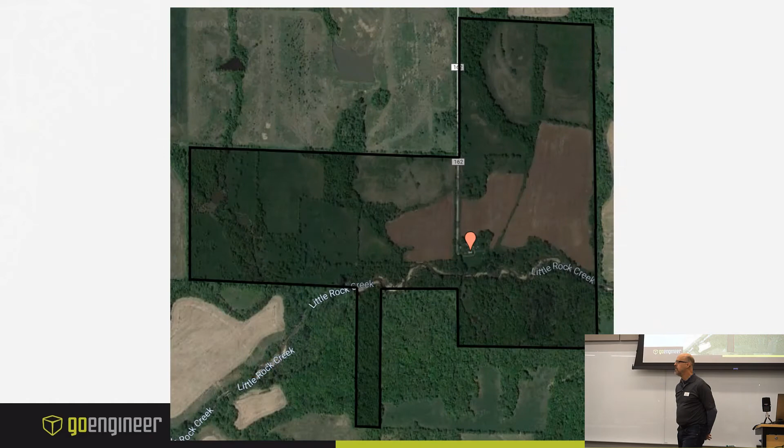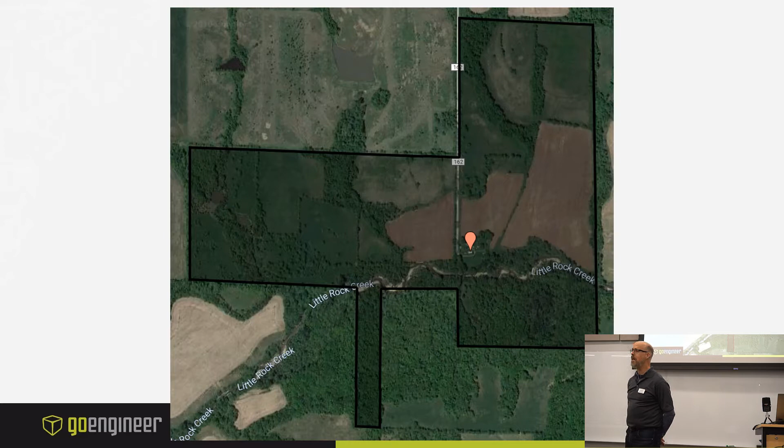Back in August of last year, my wife and I got the last of our 4 kids off on their own, and we decided to escape to a farm that I inherited up in Northwest Missouri. So I've got 188 acres up in Northwest Missouri, in the smallest county in Missouri, Worth County. My wife and I are out there trying to restore it. My grandfather and my father were both raised on this property, so we're now trying to bring it back up to its original glory. It's kind of fun.

So what we're here today to talk about is Weldments. I use Weldments in the shutter industry to do the frames around the shutter, because each shutter is custom, and I used it for wood. Obviously Weldments are kind of for metal, but I'd like to get an idea of what you guys are using it for a little bit, and kind of help me make sure I cover some of the points.

So, are you using Weldments? Larry, you're new to using SolidWorks, so this is new to you, you haven't even used it at all. What about you for Weldments? No Weldments? Chassis design, okay, cool. You guys? Tanks, stainless steel vessels, stainless steel assembly - Weldments for that?

Somewhat? Okay. What kind of challenges are you up against that you're hoping to get today? A lot of the challenges we're seeing right now with the smokers being barrel shaped - we design it in SolidWorks as a cylinder, but in reality there are flat spots, and so when we get out to the floor and into the assembly process and the welding, the fit up is not always what you'd see in theory.

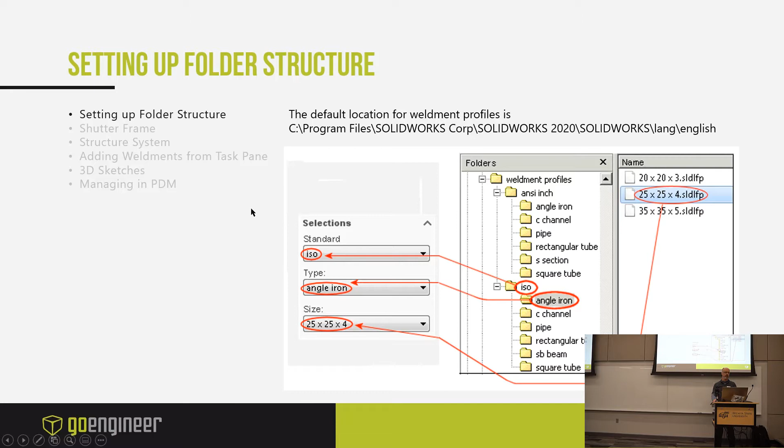It's a little bit of a nuance though if you use configured profiles, and I'll show you this when you download the files - when you click on the link, you're going to get a configured folder that goes right straight into a library feature part. In that situation, when you click on the type, you'll notice it says configured profile. It gives you this library file part that has configurations in it, and that will populate the size. So there's a little bit of a nuance when you're setting those up in the folders.

So ANSI configurations here - this is a configured part, and let me drop this over into SolidWorks real quick.

Windows Explorer is... best laid plans.

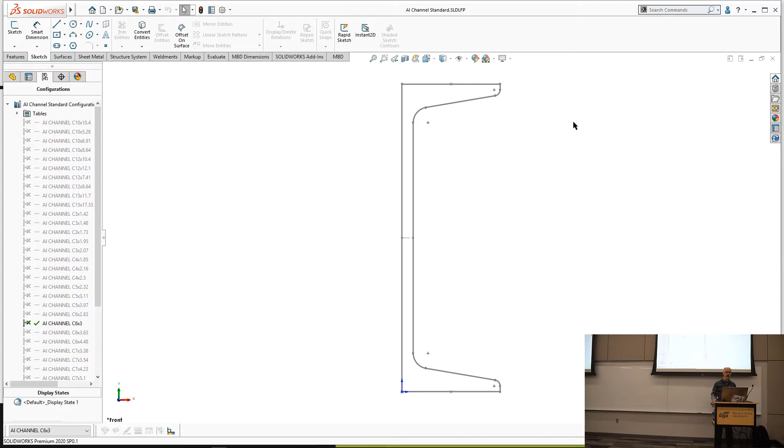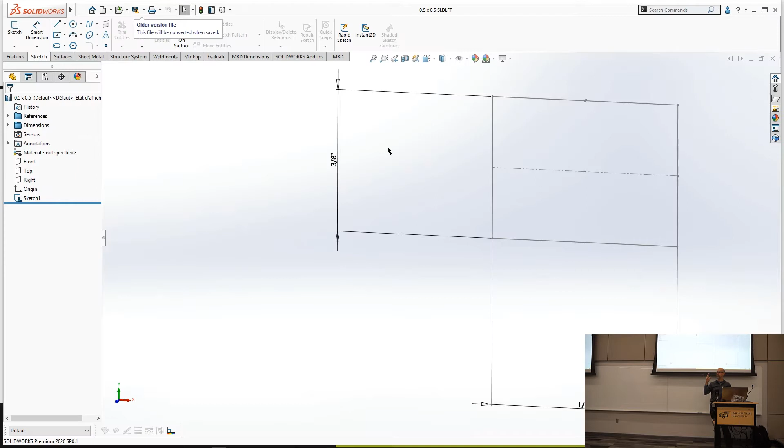If I look at the subfolder version, down here I've got a wood profile and then a hardwood profile, so there's two levels there. These files here don't have configurations in them, so you have to set those folders up a little bit differently, and it's a little bit tricky to look at. Notice there's no configurations in this one - so something to look at. Whether you've got configured files or non-configured files, there's a little bit different setting that up.

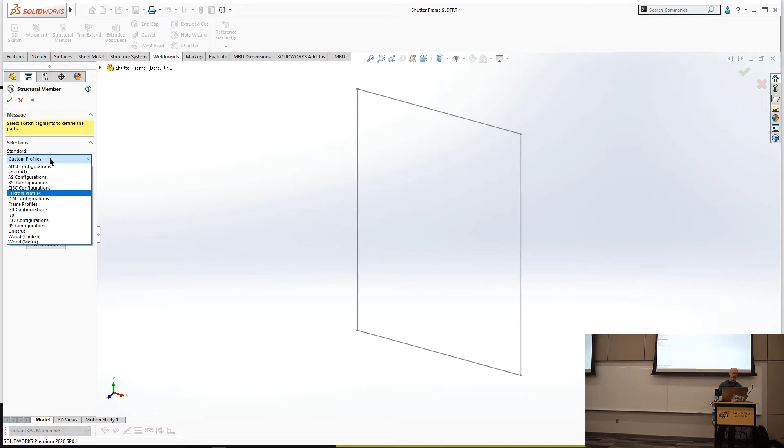So let's take a look at this shutter frame. I'm going to start out with just a sketch, and go over to the Weldments tab, structural member, and then here's that list you're looking at. So here you can see the ANSI configurations - I've got one down here called frame profiles, and the type is Z-frames, industry terminology here, and then colonial Z-frame.

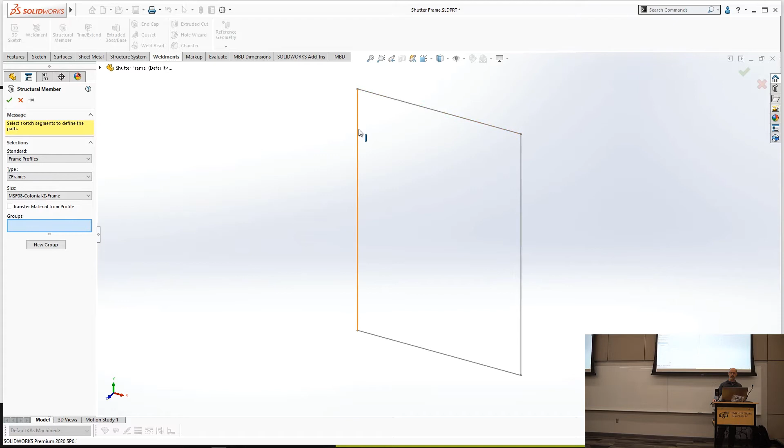So you pick your profile that you're wanting to use, and then you have to go in and select your groups. I'm just going to select the 4 sides, and you can adjust your corner trims as needed.

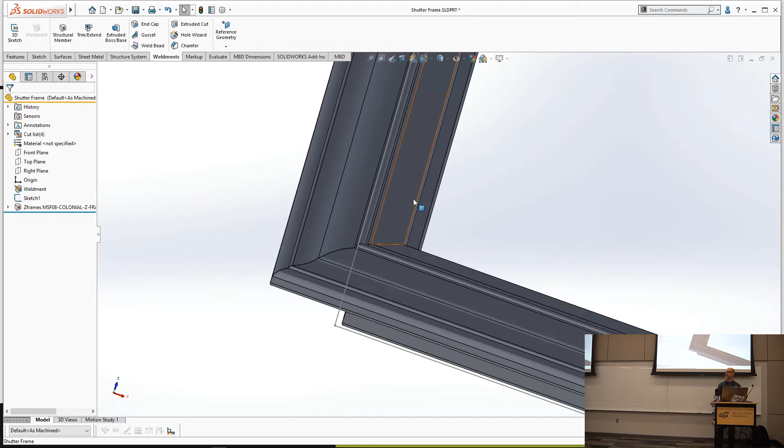Let's zoom in here a little bit. So this is a non-uniform profile, it's asymmetric. Sometimes when you bring an asymmetric profile in, it may not come in exactly like you want it. If you think about a shutter frame going into a window, this is the part that goes into the window, and this is the decorative flange part of it.

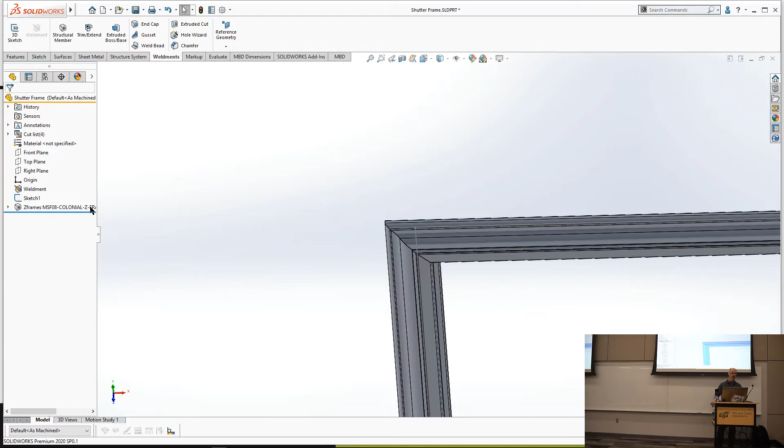So this would come in correct. This is what it would look like in the window, this is how I'd want it positioned. But let me go over and change this. I'm going to edit the feature and click a different frame profile I've got here.

If I go to a top-down view on this one, the decorative portion of the flange is on the inside of the frame. So I want to flip it around.

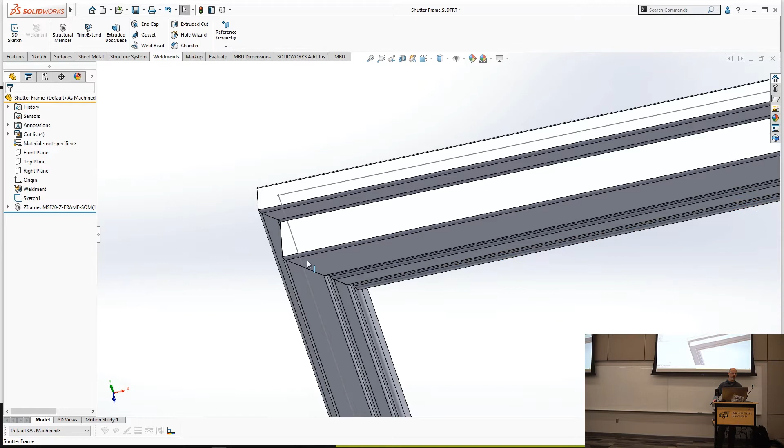The way you do that when you're editing the feature is down here at the bottom, you've got an option to mirror the profile, and you can see a couple different orientations. There are two ways to orient it. You can see the decorative feature here on the back, but I want that on the front. So instead of mirroring about the horizontal axis, I want to mirror about the vertical axis, and that gets the decorative feature to the front.

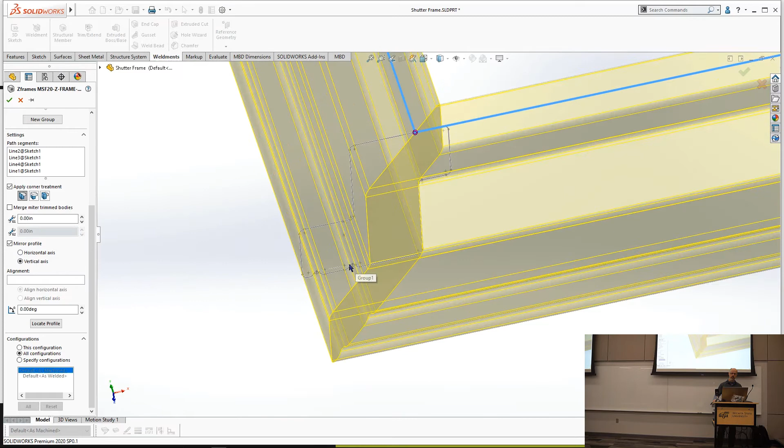So that's how, if you get an asymmetric profile, the way you draw your profile may control how it comes in. Does that make sense?

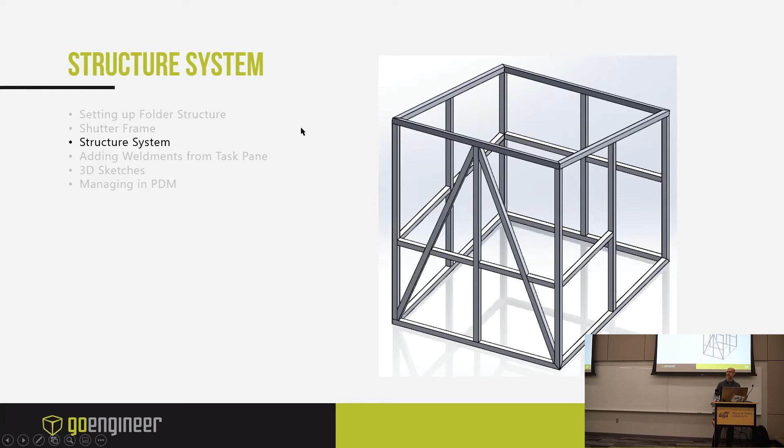Structure system - this is the new thing in SolidWorks 2019, and I'm using 2020. The way the structure system works is you can use sketches, planes, faces. This is a demonstration, actually off of the GoEngineer website - I borrowed his concept on this.

You can see there are two sketches - there's a sketch at the bottom, and this vertical sketch here. There's an axis that's used to define the angle of this plane, and a couple of other planes, and another reference plane. I'm going to show how this works.

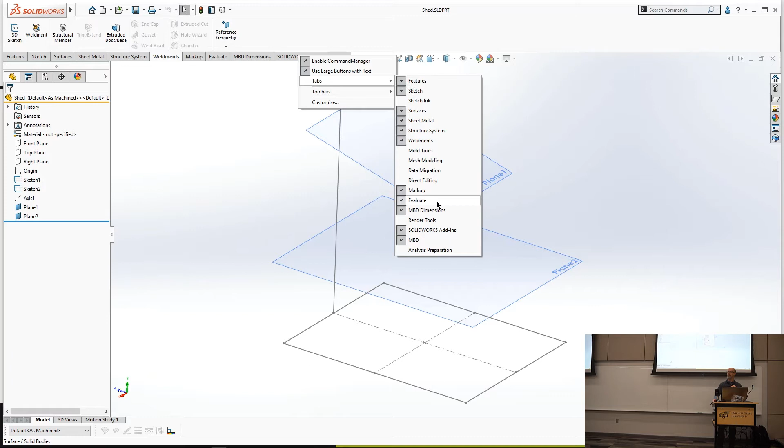Structure system, if you don't have it turned on - when you right click, this is something new to 2020 if you haven't seen this yet. Before in 2019, when you right clicked on this you'd get a list of tabs. Now they've got it consolidated into a tab folder. So when you click on that, you'll see the list of command manager tabs on the side. You have to have structure system turned on, and you get the structure system options up here.

You click on structure system to go into the command, and I want to click a primary member. Here's the different types of primary members - you can do a path segment, use reference planes, use points, and do intersections between faces and planes.

I'm going to start out here and use the point option, and the up to plane option. I'm going to go around here and click - for the points, I want to click these bottom corner points, and I want it to go up to this plane. For the reference axis, I want it to go along this axis here.

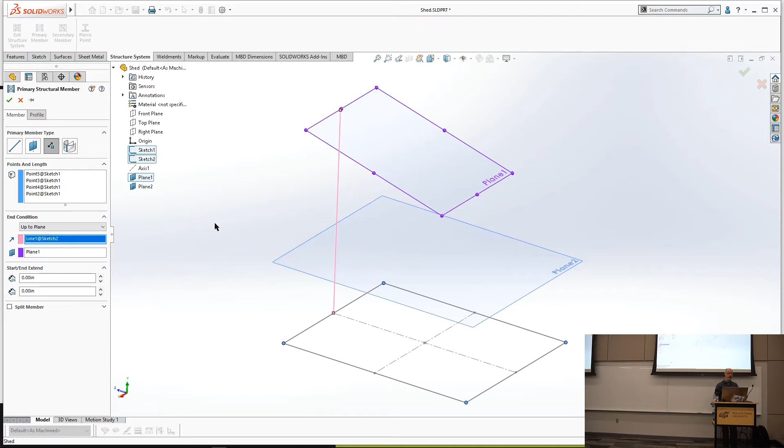Now notice nothing happened - I need to select a profile. So I'm going to go over here and click on my standard, go down to ANSI inch, and use square tube.

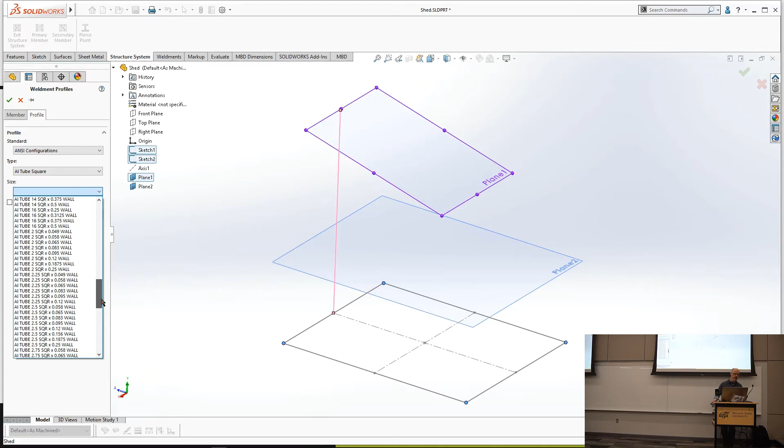Actually, let's go to ANSI configurations and select aluminum square - aluminum tube square - and let's go down here and grab a 3-inch. Notice this list is quite a bit longer, I'll show you how to get this list in a few minutes. So let's go down here and grab a 2-inch square with an 065 wall.

Notice those tubes popped in there based on those selections. It used the points for the location of it, and then it took it up to the plane.

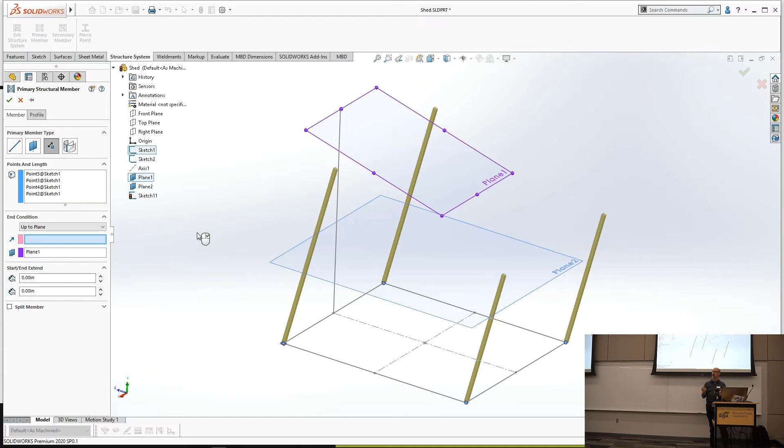If I go back over here to the member, let's clear this selection for a second. Notice it's trying to go perpendicular to the plane, so I can use that sketch line to drive the direction of it. There's a little pin icon up here at the top - that pin icon is used to lock it in place because I can do multiple features across this now.

Let's do a point to point. I'm going to use the point down here, say up to a point, and pick this point down here in the corner and up to this one.

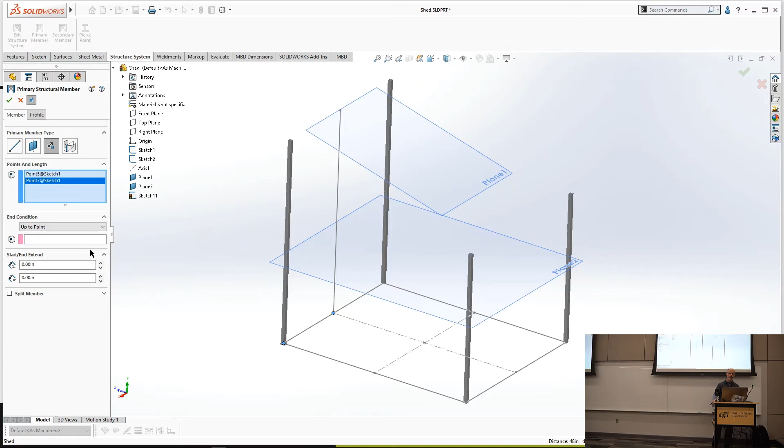I'm going to pick my reference points to start, and the up to point is this point up here at the top. So I can bring all those up to one point, so I'm not having to create sketches for this. I don't have to create sketch lines for each of these paths, and I'm using geometry to be able to do that.

So then those are primary members. Notice there's a primary member and then there's a secondary member. Secondary member is where I go in and create secondary members between this geometry, and I'm going to do between members.

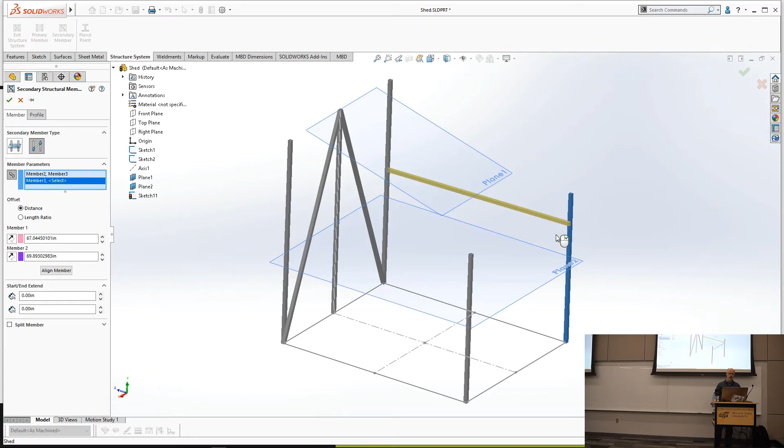I'm going to select this link icon to go between these members, here to here. So it linked those selections together.

I can tell it to set that off at a distance, or I can have it at a length ratio. Length ratio meaning how far from each end. I'm going to go 50% on each of those. So notice it's going 50% from that member to here and then across.

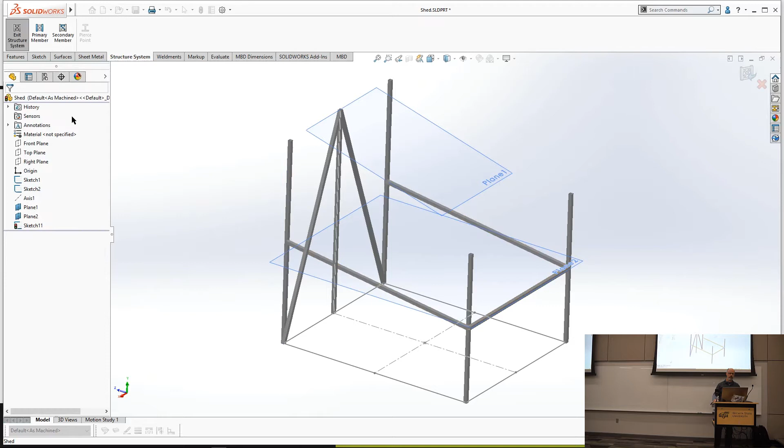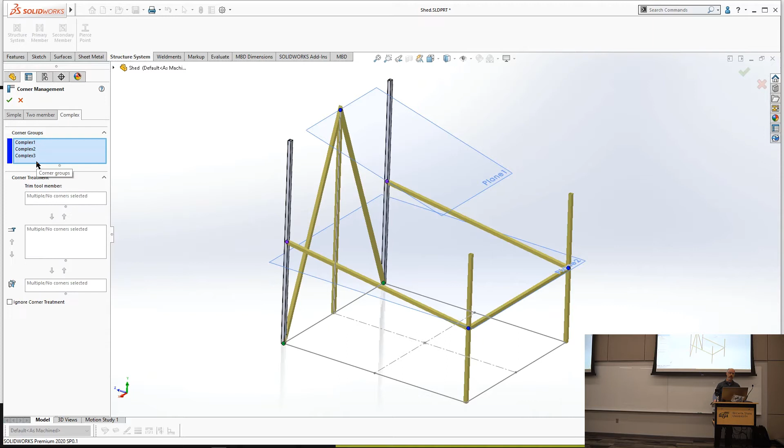One of the beauties of the structure member is once you exit out of the structure system, it goes into a corner management mode, which is where you tell it how to trim the corners. Depending on the types of corners you've got, there's tabs across the top: simple corners, two member corners, and complex corners. You go through and manage each one of these as you need. You can let it go automatically, or you can control it individually.

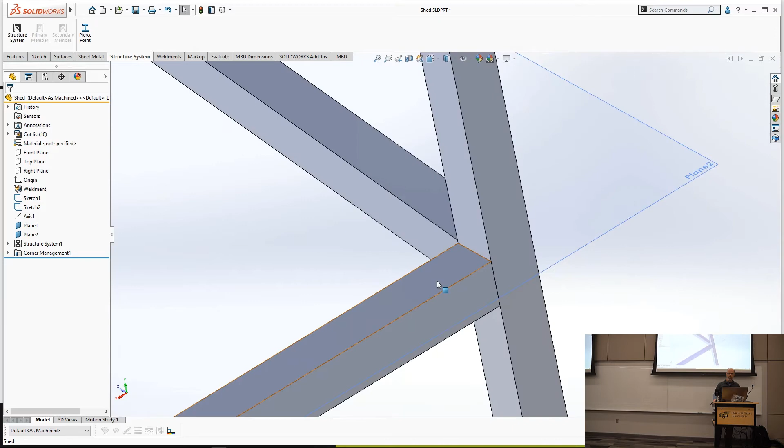If we just go ahead and let it do its stuff, you can see here that didn't quite trim it like I wanted it to. Look at these corners down here—it automatically trims the corners to some extent, but you can see that kind of got complicated up here in these corners.

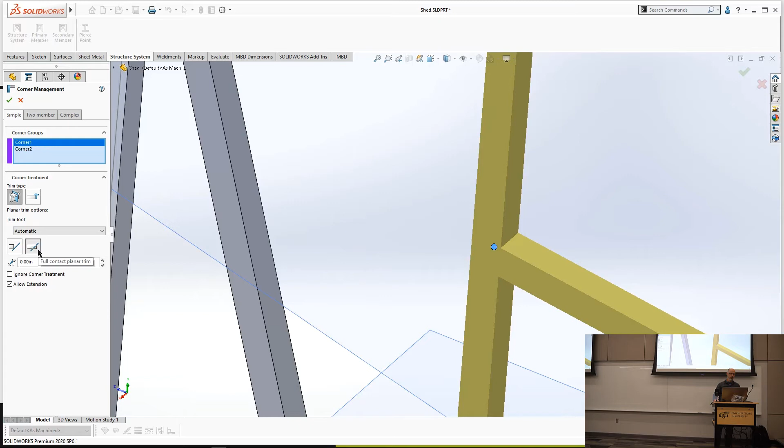So if we go back in and edit the corner management, we can select the corners. You can see the dots at the intersections. If we click on those dots, it shows us those components in there. We want to use a full contact trim for this one, so we can go in and manage those corners.

Let's go over here to the complex corners and see what we can do on this one. On the complex corners, you've got some options up here for corner treatment. You can do the trim tool.

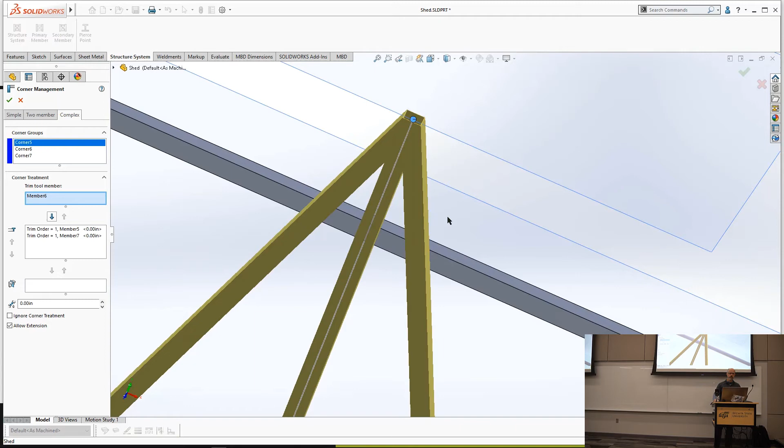Now let's say we want this to be the trim tool. So I'm going to click on that component in the graphics area, and I'm going to shift that one up to the top. So now it's going to trim these two to that one. When I exit the sketch there, you can see how it trimmed each of those to that part.

So that's a quick view of structure system.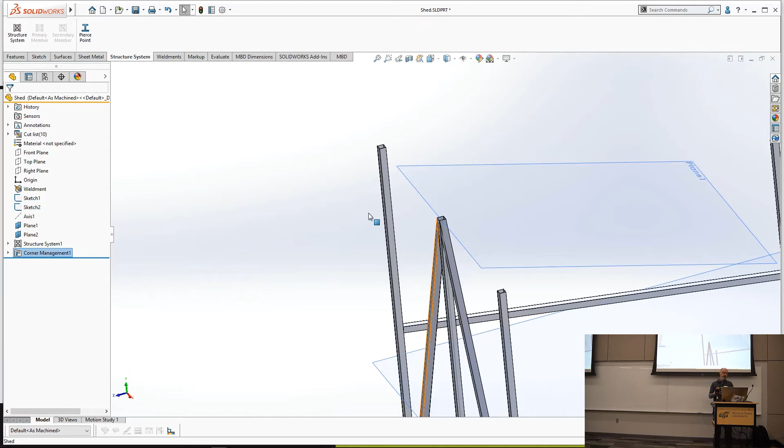So if you notice in that corner management, if I click on this corner again, let's go to complex corners. Here's the gap down here—it looks like on complex, I don't have the option for doing the gaps. On two members, here's the gap down here for setting that gap. So it looks like on complex members, it doesn't give that option.

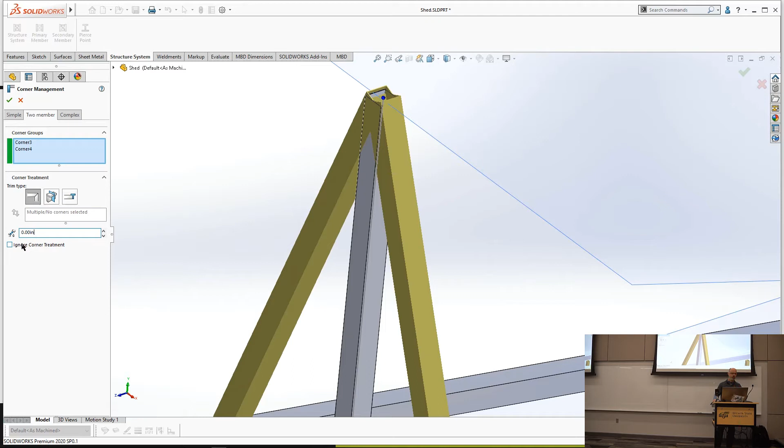Marcus, do you know? I was going to say, click the dot. Oh, correct—so once you activate that corner, it does have the option to do the gap there.

Any other questions? This takes some time to get your head around. I'm still working on it, to be honest. I mean, it came out in 2019.

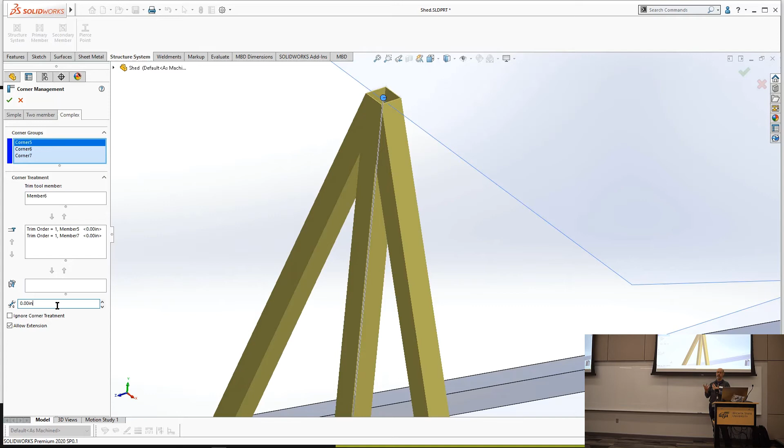You have to put some forethought into it because you've got to lay out where you want your center points to be ahead of time, where you want your intersections to be. So if you're setting up planes and surfaces, there's a little bit of planning besides just setting up a sketch. So that's a quick introduction to that.

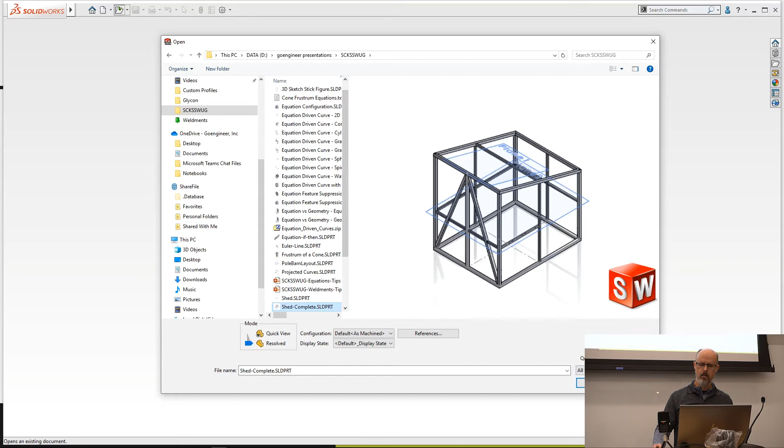One of the other things I want to show real quick - here's a completed version of that shed.

One of the neat things about the structure system with 2020 is the ability to mirror the structure system. So if I wanted to mirror this whole system, I don't have to pick every body. This is a multi-body solid, right?

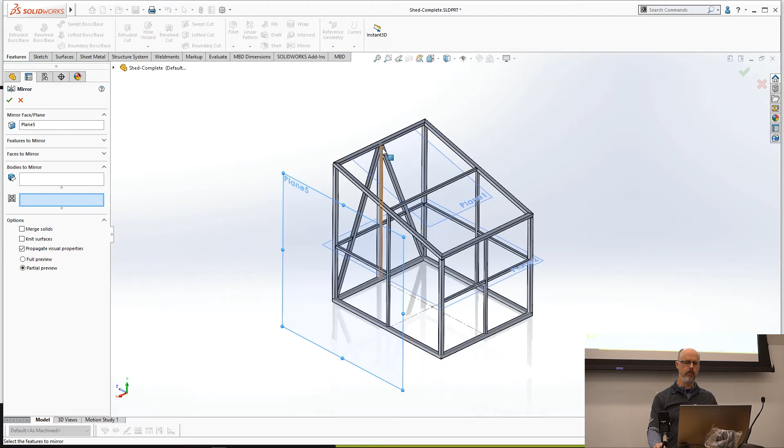It's got a cut list over here on the side that's got all the bodies in it. If I bring an offset plane over here and go into the mirror command, bodies to mirror - there's a new option down here for structure systems. I can click on this structure system option and mirror that whole structure system, and it creates a new structure system that I can create new components between.

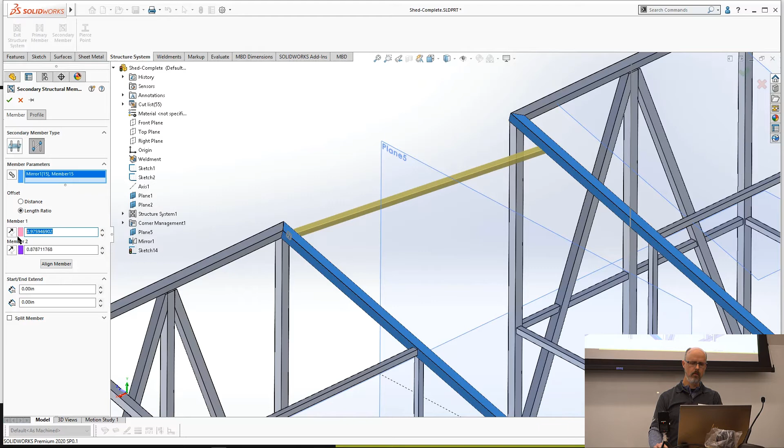So if I want to add a new structure element between there, if I go over to structure system and want to create a secondary member, it recognizes this as a structure system, and I can go in here and set the length to be 1 to 1. So it recognizes that new component as a structure system with the mirror. That's a really powerful capability.

You can see it can be pretty easy to create a pretty complex weldment with just a little bit of information. And then it goes into corner trim again and trims that corner automatically.

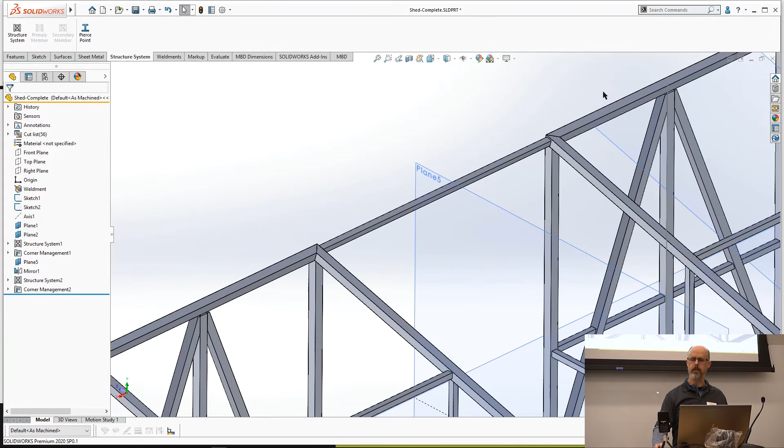So I talked about out-of-the-box SolidWorks, which comes with a limited amount of tools to use. You can get more of them by going to the task pane under Weldments. You'll see this ANSI inch zip. When you control-click on that file, it'll download a zip file. Once you extract that zip file, it gives you all those folders that I was showing you a minute ago.

If I bring up File Explorer again, and I go down to my Weldment folder, these are the configurations that you'll get if you download each of those folders. So if you look back over, there's ANSI inch, AS, BSI, DIN, all these standards, Unistrut. When you download those, you can extract them, and that'll give you all these configured files to use as Weldments. So you can expand your library by going and getting those from the task pane.

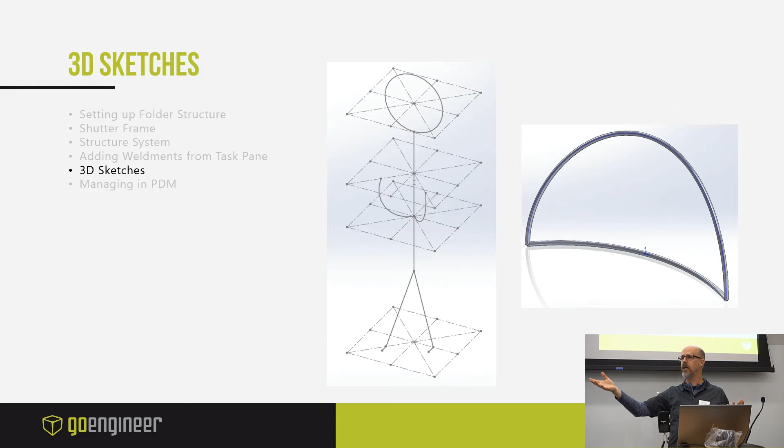So, 3D sketches - they're a challenge to use. Anybody ever used 3D sketches? Yeah, they're kind of tricky to use, right?

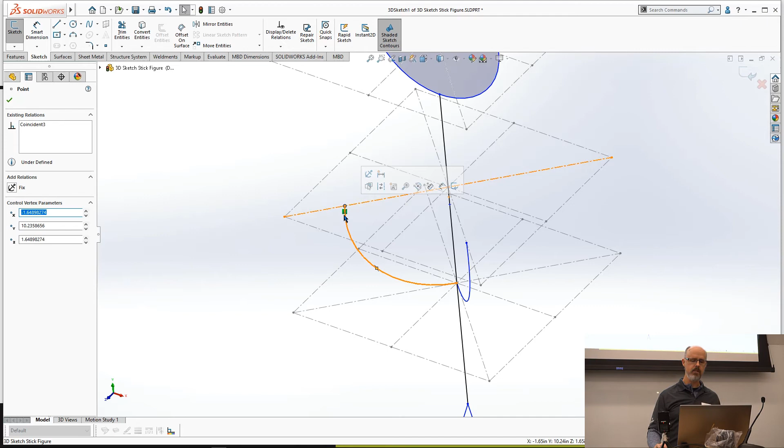I Googled this picture early today, and when you create 3D sketches, a lot of times it's good to have reference sketches. So each of these reference sketches were used to constrain the endpoints of the 3D sketch. I'm not going to go into a lot of detail about 3D sketches, but they're a little bit tricky to use. When you sketch in 3D, you can toggle between planes. You can create references to external sketches like this.

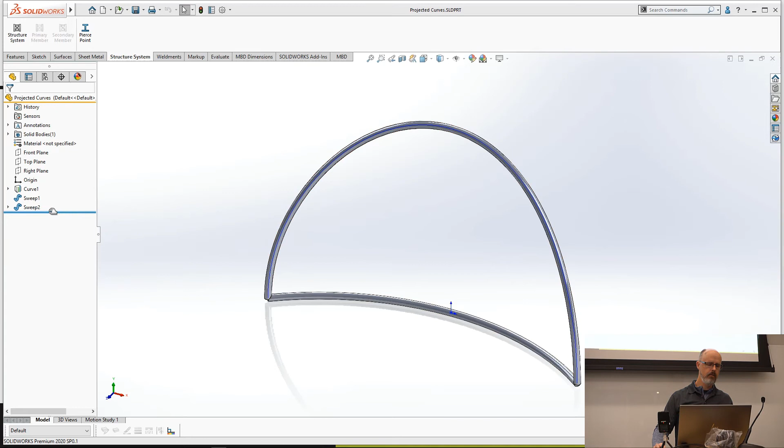So that's kind of the easy way to do that. Another way to create geometry is using intersecting sketches. This is one that, if I roll back in here, you can see this curve, and this curve is created by two sketches. I've got a sketch that is just a curve on the top, and then a sketch that represents the parabola on the other side, and then I did an intersection.

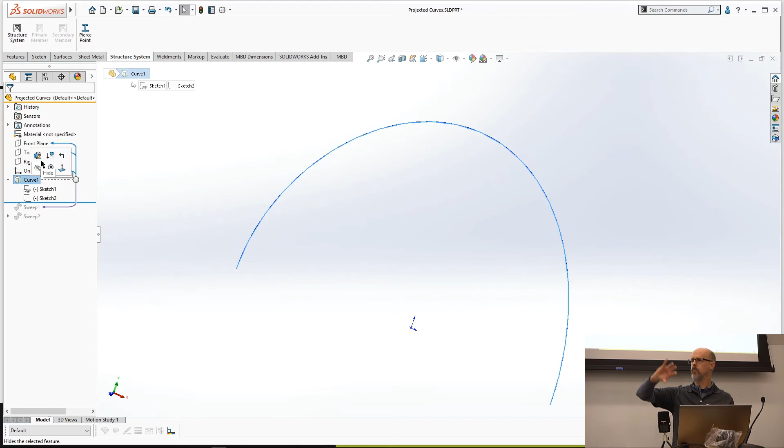So when you intersect those two curves, you get that 3D geometry that you can sweep something around. If you know what it looks like in two different orientations, you can sketch that, project those two together, and get a composite curve that you can use for geometry. And then I just did a sweep to join those together.

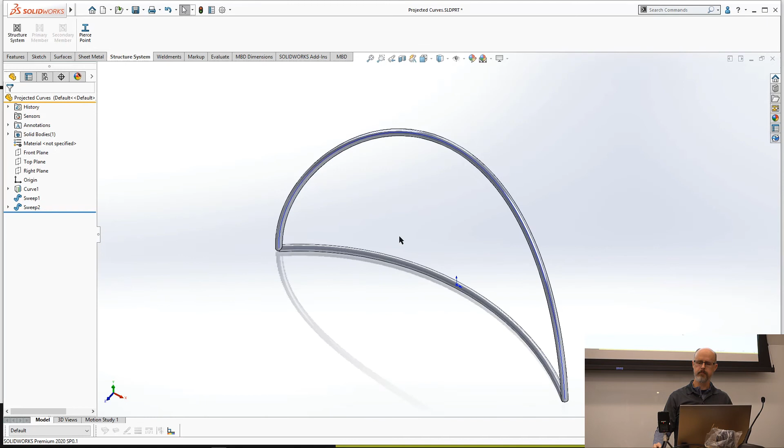Let's take a look at 3D sketching. So to get to 3D sketches, you go to your sketch, 3D sketching. We'll start a line. You get a little bit of information when you do this. As you start to sketch, you see the XY next to the cursor. That's telling me I'm in the XY plane.

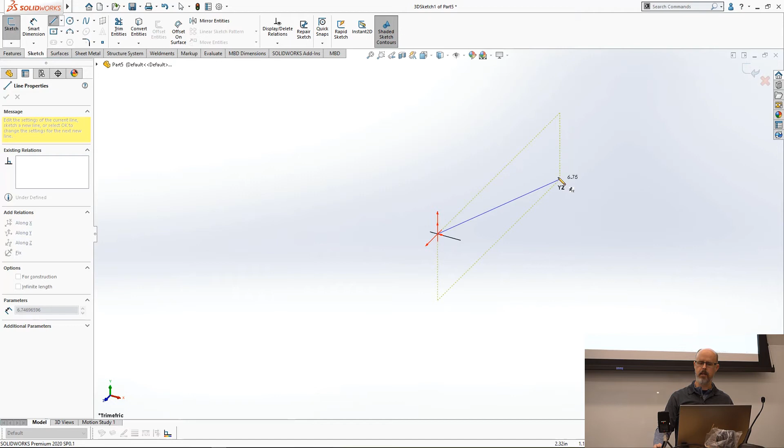You can toggle between those by pressing the Tab key, and now it's in the YZ plane. Press the Tab key again, and it's in the XZ plane. So you can toggle between those orientations by using the Tab for sketching. And you get your inferencing lines as well. So when I dropped that there, it created an Along Z constraint in there.

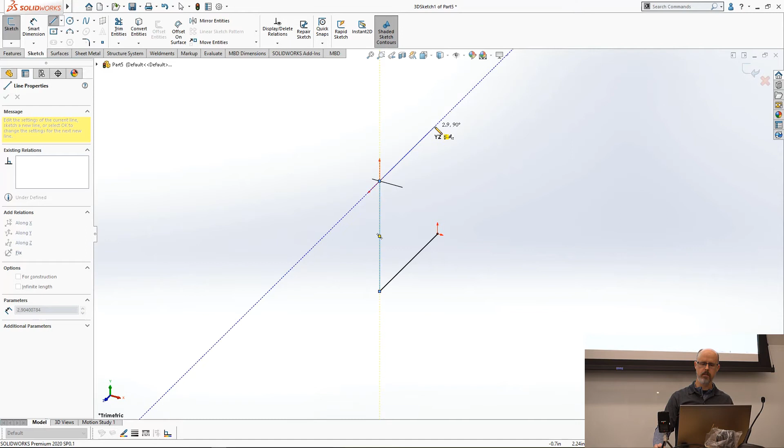Using the Tab key to toggle between the planes and looking at your inferencing lines makes it a little bit easier to create those sketch elements. But you kind of have to think about it a little bit. You have to know, I'm tabbing between my planes, I'm changing my reference planes. Here's a little trick that I picked up a while back.

I'm going to create a surface and use that surface to create my weldment. So I'm going to start on the top plane, and let's just do a center point rectangle for simplicity purposes here.

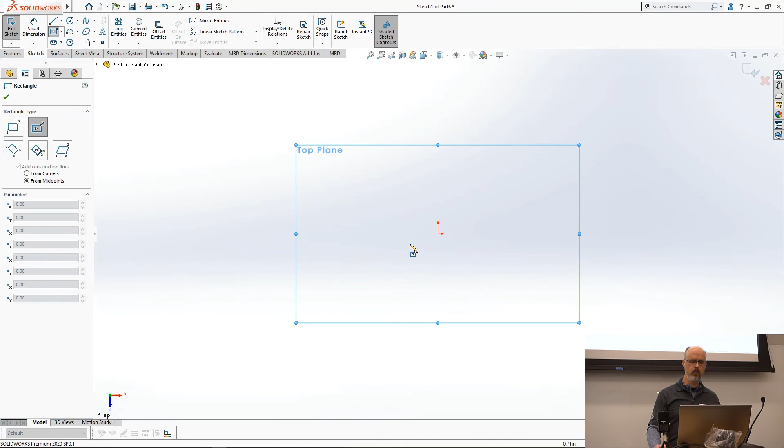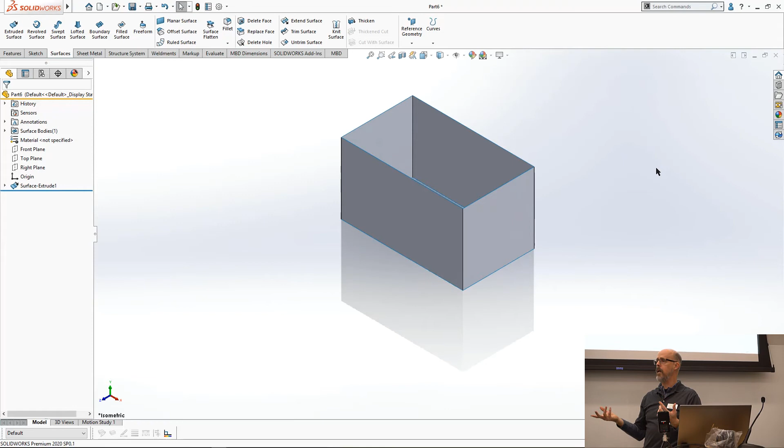I'm going to go to surfaces, and I'm going to extrude a surface up. Now the nice thing about surfaces is there's no mass to it. So if I'm using this to create my weldment, it's not creating additional mass in my model. If I extruded a box, then that would be mass in my model, but using a surface doesn't do that.

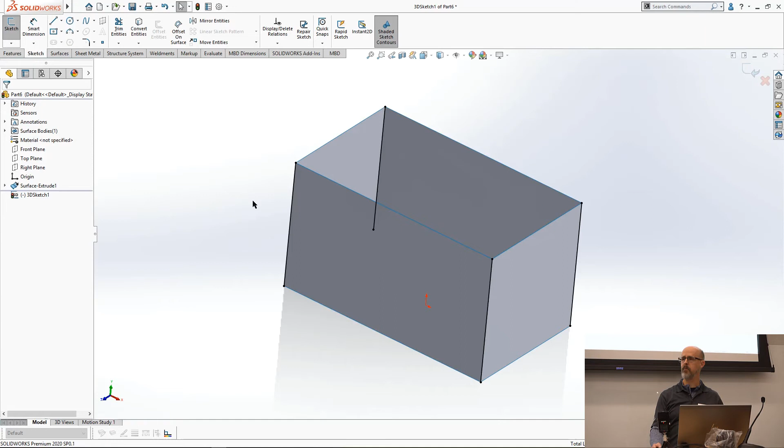I can now use this with the structure system. I don't necessarily have to do this, but I'm going to show you how, if you don't have structure system yet, you can create a 3D sketch easily using this geometry. I'm going to go over to sketch, start a 3D sketch, and pick each of these edges and do a convert entities. So I now have a 3D sketch driven by that surface geometry without having to go into 3D sketch and draw each one of those. I can create it a little bit easier using 2D geometry and then convert those edges to create the 3D geometry.

Boxes or a rectangle is a pretty simple example, but hopefully that conveys the idea. If you had a curved surface, you needed to get geometry on that and do a similar surface. Any questions about that? Does that make sense?

Yeah. So a common thing I use convert entities for a lot of times is they don't update all the time. And so you lose, it does happen — I mean, 90% of the time it updates, but 10% of the time, when you really need it to update, it loses it. It's hard to say, I mean, I would have to see what was going on with that. But yeah, it's something to watch out for.

Anybody else have any experience using this? Is this idea new to anybody?

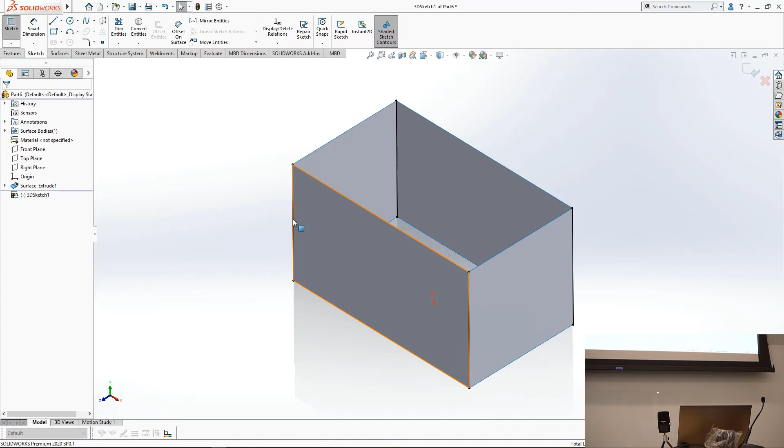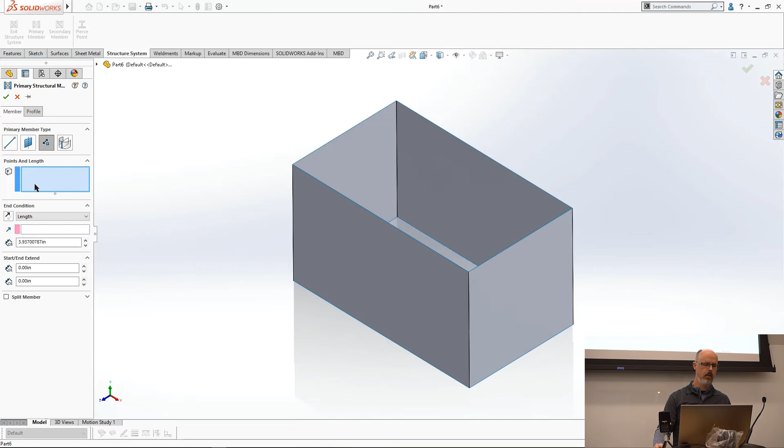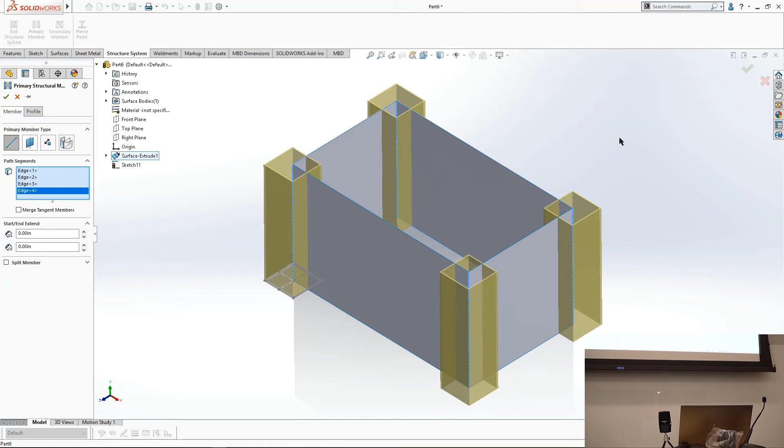With structure systems, as I mentioned, you don't have to do this. I'm going to delete that sketch. I can go in and create primary members using that geometry. Let's click a profile here — we can still have a square. It recognizes those edges as sketch edges already for me, so I didn't have to create any sketch elements. I'm using the actual surface boundary to create the geometry with. So if you can create a surface to get you what you're looking for, then you can use those edges for sketch geometry for your weldments.

And then once you're done, you can hide the surfaces to get your final weldment.

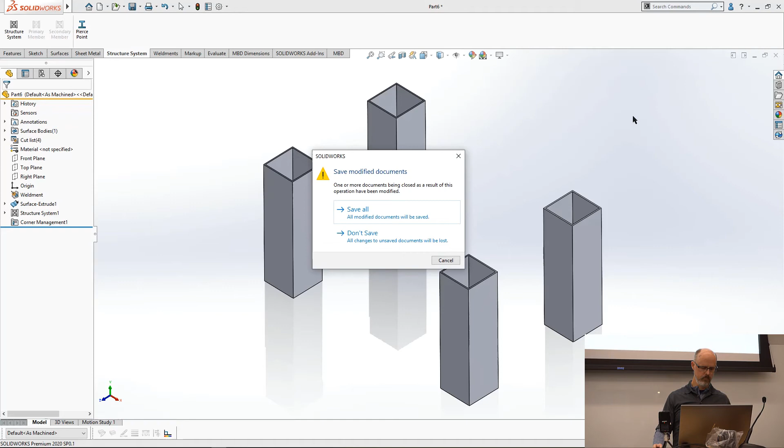Let's talk a little bit about managing these in PDM.

If you're doing weldments, let me ask a question: when you do weldments, do you have to set each of your components up as individual parts, or do you manage them differently? Each part has to be controlled individually — each part is an individual part. That makes it a bit of a challenge, especially using PDM, because SolidWorks PDM recognizes that part file as a single file, so your individual bodies inside can't be split out. The only way to do it is to use the save bodies command, which saves all those bodies out as separate part files that can then be managed. Your master file is the part file, and all your components are driven from that. That's the way to do it.

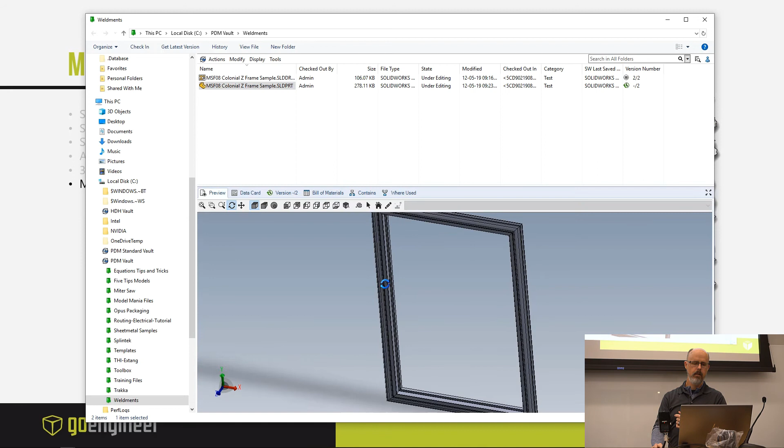If this is that frame sample I had earlier up on the screen — one of the things about weldments is under the bill of materials, once you've created a weldment, you can get a weldment bill of material which shows the total usage of each component, or you can get a weldment cut list which shows the internal weldment cut list in the BOM. So you can get that from the part file in PDM, but you're not going to get individual parts unless you save them out using save bodies.

Anybody else using PDM for weldments or anything like that? Marcus, you got anything to add on there? I guess I open it up for discussion at this point. That's really all I have for tips and tricks. Is there anything anybody wants to see? Any questions we want to try out? This is supposed to be a user group, we're supposed to all be helping each other out, so I kind of facilitated some of this discussion. Did I bring anything up that anybody wants to see questions on?

I'm completely new to it, but what if you didn't want to use anybody's standards for your weld profile, but wanted to create a very specific profile for the weld you want to call out? Great question, maybe that's a simple thing.

There's some steps involved with it, so we can take a look at that real quick. Weld or structural shape? The actual weld itself? Yeah, so I want to create my own profile. He's talking about the welds themselves, like the actual weld. Yeah, like I have used it, but I'm guessing that your ANSI and JIS and all that is going to kick out a certain profile for the weld to relate to the material behind it.

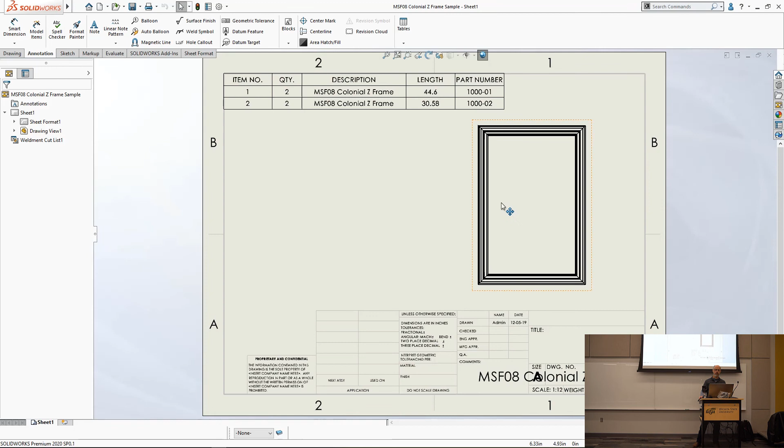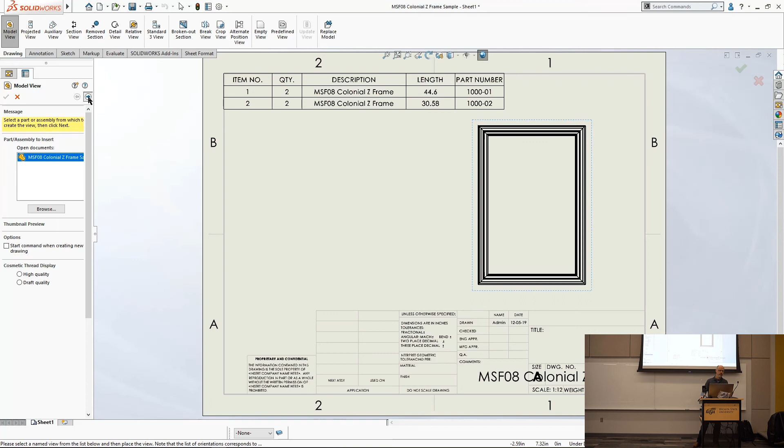So go to the drawings, first do a model view. That's the Drawing tab up at the top. Usually you just click OK or drop it in. But if you hit Next instead, down there it says Select Bodies under the configurations, you get to go back to the model and say I want only this one. You grab it, click OK, and you now have a view as if that was the only body in the entire part.

You can project it, you can do anything you want with it. That's a part, but it's actually just a body from the part. Say for instance, that frame right there.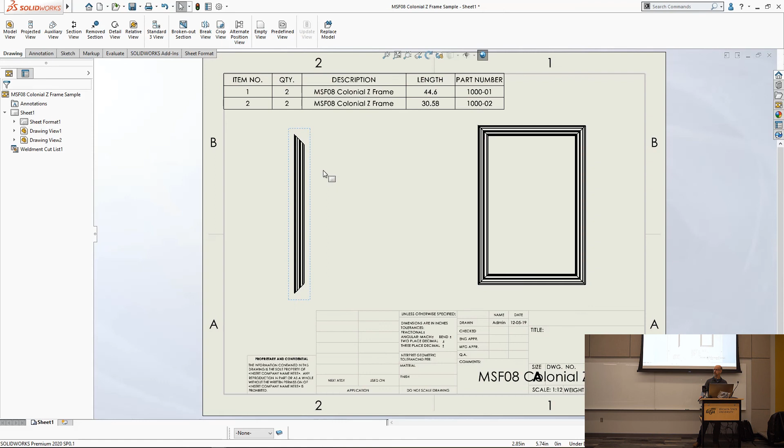I would create 2 drawings, quantity 2 each, hand it to the guy, he'd go back to the stock rack, grab the material, walk over to the saw, and cut it at whatever angle the drawing tells and whatever length. You can put the angle cuts in the cut list, or detail it in individual views. So sheet 1 would be the first piece, sheet 2 would be the second piece. You just create views as if each one is the same. So 1 drawing, 2 sheets, or 2 drawings, 1 sheet each, over a view.

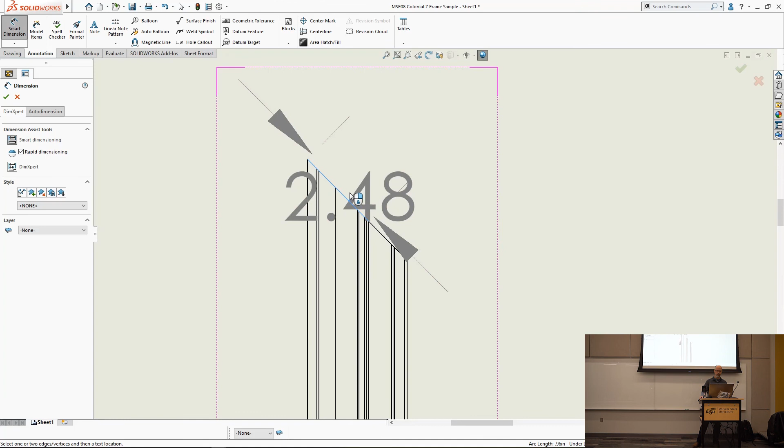The other one is relative view, and it's not on the drawing tab, so it's one of those secret drawing commands. This is where I like using the S key. Hit the S key and type relative. I guess I got a spot right. Yep.

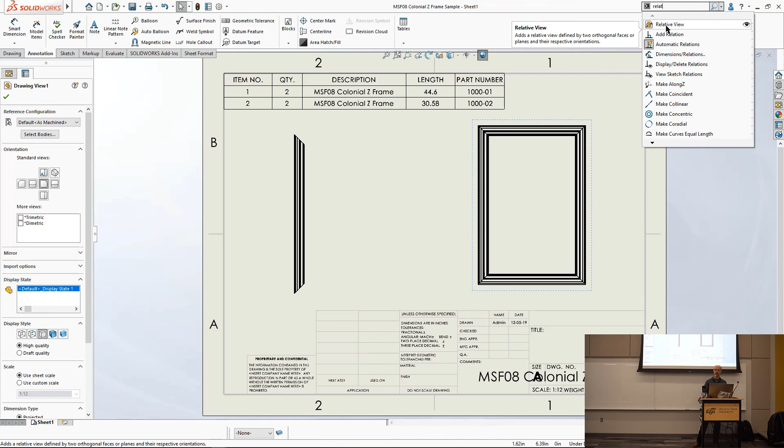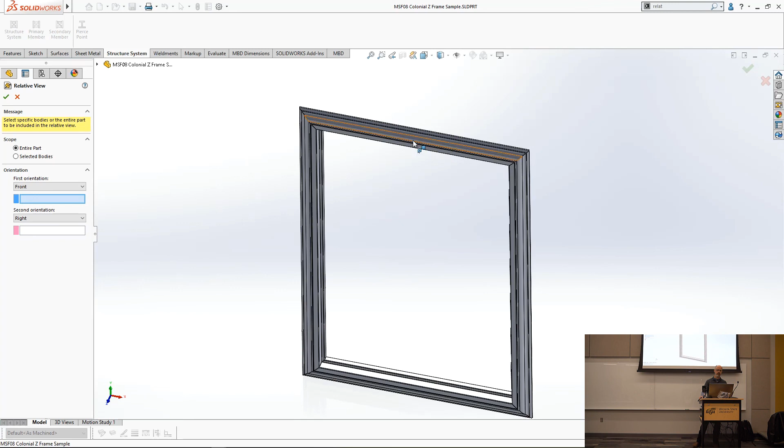There you go. And it works the same, except what if those weren't orthogonal? What if there was a cross member at a 30-degree angle, but you wanted it cut on the saw straight? You didn't cut it on the saw 30 degrees off, right? So you don't want to put it on your drawing 30 degrees off. With the relative view, you pick your bodies, then pick your orientation. This may be a bad example, but see where it says front or right, front top, or front bottom? You grab 2 references and say this is what I want to call the front of this piece, this is the top of this piece. Then no matter what orientation it is, even if it adjusts later with design changes, it'll always show flat, drawing the cuts exactly.

Those two - if it's orthogonal already, model view will get the job done. Relative view takes a couple extra steps, but has that orientation aspect to it. I had customers that would do the hide show bodies, but then they'd change the size of the frame, the cross members would change angle, and their drawing views would go angled, and they were constantly fighting that. So it's relative view.

I love being able to share this information. Thank you, Marcus, that's terrific. That's terrific.

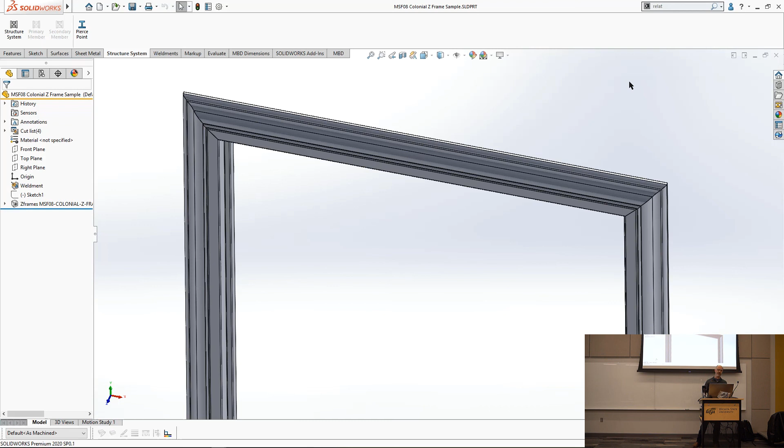All right, well, as I mentioned, I live on a farm. We set up a live catch trap, and we caught a raccoon. And I'll tell you what, raccoons are smart - they were actually able to get out of the cage.